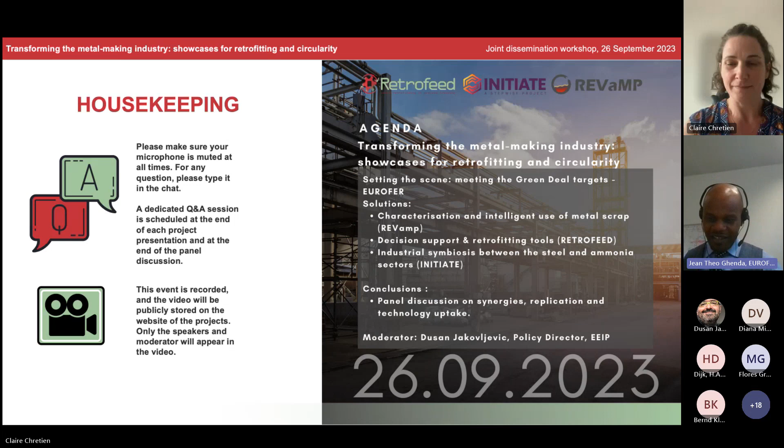Thank you very much, and thank you for inviting me, and good morning, everyone. So transforming the metal making industry, that is the introduction to today's discussion and exchanges we will be having. So would you help with showing the slides? Of course.

Just one second. Next slide. So a short introduction on the European Green Deal.

The European Green Deal has been presented in December 2019. It's the European growth strategy to make the EU economy more sustainable. The overarching objective is for the EU to become climate neutral by 2050. And the core of the implementation activities in the frame of the European Green Deal is the European Climate Law, which turns the 2050 climate neutrality objective of the EU Green Deal into legislation.

They have also defined a milestone toward these targets: a target for greenhouse gas emission reduction in 2030, that should be at least a reduction of 55% compared to 1990.

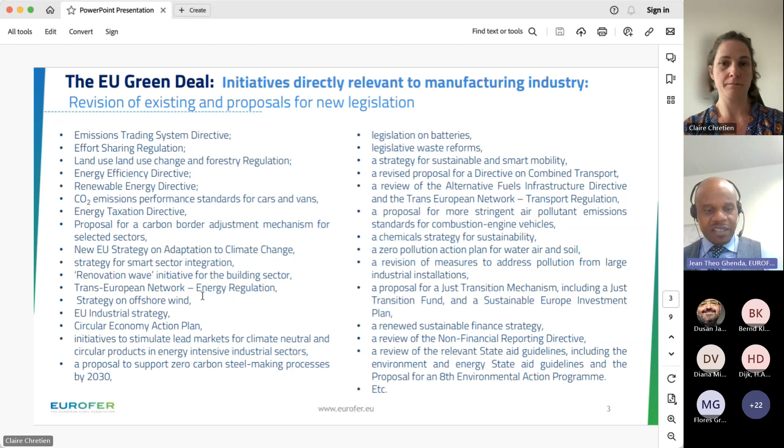Next slide, please. Now, when we talk about decarbonization of the European metal sectors, we know that those sectors have already been decarbonizing. But if we look at the objective of the EU Green Deal becoming climate neutral by 2050, this will require deep carbon emissions cuts, and this deep carbon emissions cut can only be possible through new technological pathways.

If we analyze the different pathways being considered in energy intensive industries, including metal making sectors, we can group those pathways into three blocks. The first one is continuing with fossil carbon, but using less and less - what we call smart carbon usage, which we can achieve through process integration, making the process shorter and using internally the process gases, or through carbon capture and usage. Both process integration and carbon capture usage can also be combined with carbon capture and storage.

The second pathway is to avoid using fossil carbon altogether. How do we do that? This is via using directly electricity or using hydrogen to replace carbon. The third pathway is circular economy approaches. Here, the idea is to enhance the recycling or reuse of residual materials, for example scrap, slag or dust, and also increase the use of residual energy. That will help us increase resource efficiency.

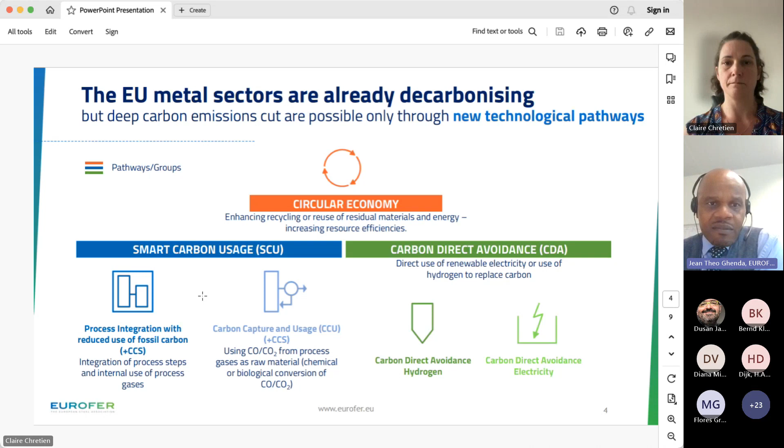Next slide, please. Here I give an example of how we apply it, for the steel industry. We show here that we have key projects for low CO2 steel making. We see that we have different projects across Europe, touching on the different pathways we have just shown. In the steel industry, we have summarized 60 projects.

Those are only the projects that have a TRL of at least 7, and that will start before 2030. Some will already start in 2025 to 2026, and they have the potential of reducing CO2 emissions yearly by around 81 million tons. That is over one third of the current direct and indirect CO2 emissions of the steel industry.

So the transformation will cost a lot of money. We are talking here about capex needs of about 31 billion, and opex needs for the next 10 years will be about 54 billion euros.

Then we will need a lot of energy. For example, for the steel industry alone, we need about 165 terawatt-hours of electricity in 2030. If hydrogen will be produced via electrolysis, for this hydrogen we will need 90 terawatt-hours to produce 2.12 million tons, and then the rest will be 75 terawatt-hours for driving the processes.

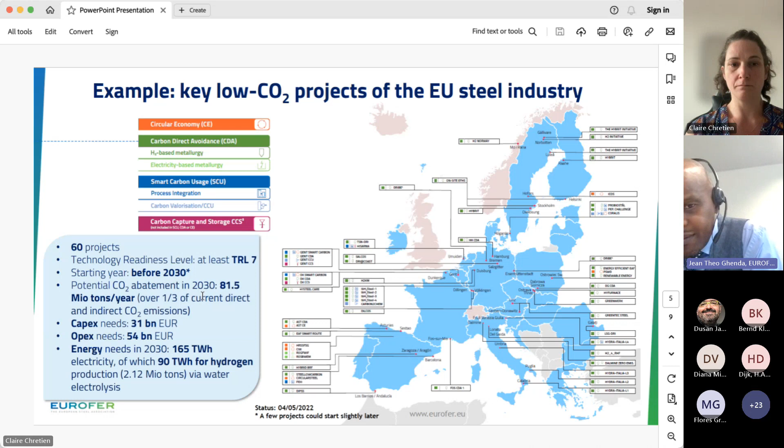Now, if we look at the metal industry in general, we can say that the transition to a net zero economy will be really metal intensive, and metal sectors will be key enablers for this transition to a circular and climate neutral economy in Europe. It will be essential for European strategic autonomy and resilience. We will need big quantities of metal for the necessary transition of our energy system, in order to achieve the EU Green Deal objective.

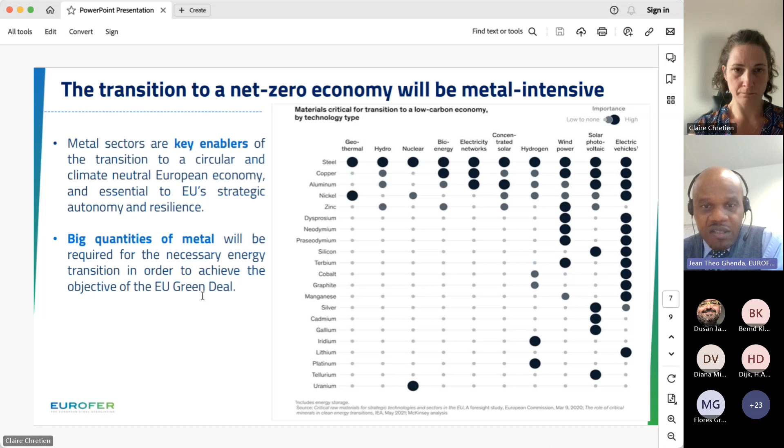Here you can see the result of an analysis made by McKinsey, based also on a study made by the European Commission, and then also based on a study made by the IEA. What we can see here is that, for example, steel, copper, and aluminum will be really needed for this transition.

Now, what are the key drivers? We need some key drivers to ensure real competitiveness, and then to spur the transition of metal sectors. One very important thing we need is to have access to sufficient and affordable CO2-free energy, and then also access to affordable primary and secondary raw material, for example scrap. Metal scrap will be very important.

And then second, what we will need is really better tailored funding and financial incentives across Europe, including the establishment of lead markets for green products, or in general for CO2 low products.

The third thing we will need is a level playing field with global competitors, and this can be achieved through effective EU trade policy, in order to ensure open and fair trade. That includes, for example, the continuation of the EU steel safeguard - that is a very important safety net. It also includes solutions that secure exports under the carbon border adjustment mechanism, which is meant to progressively replace free allocation in the framework of the European emission trading scheme.

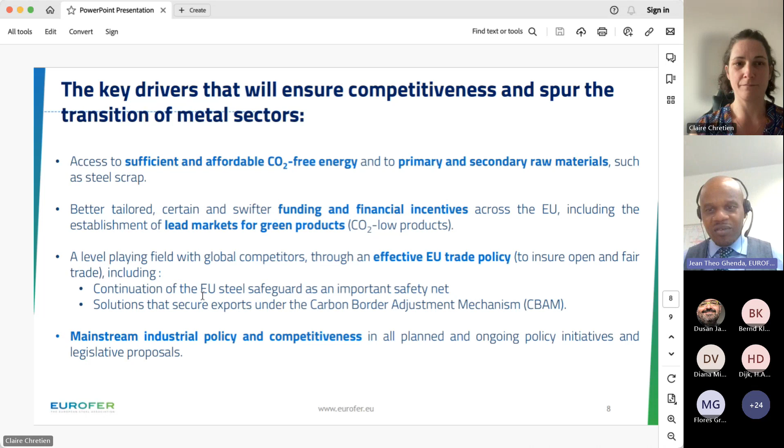So we need not only to look at the objective of protecting the environment, we need to look also at the aspect of economy, competitiveness, and the third aspect will be the social aspect, securing jobs in Europe. So those are the words I've tried to summarize in order to introduce the discussion we'll be having today. If you have further questions, please ask, or we can discuss later on. Thank you very much.

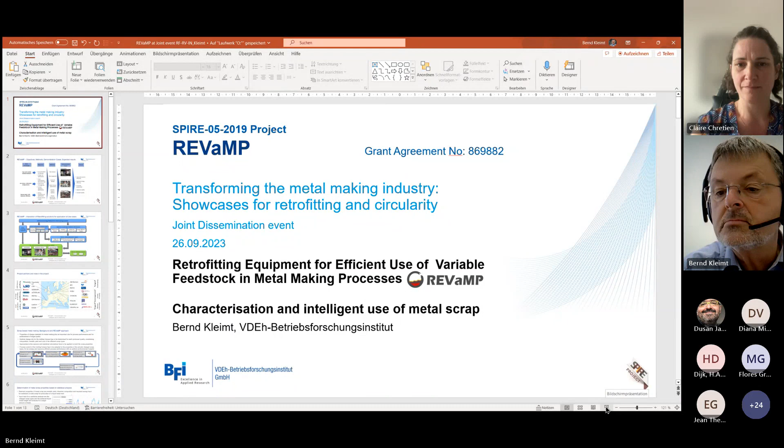So I will present the project REVamp, retrofitting equipment for efficient use of variable feedstock in metal making processes. Today I will focus on a very important part of this project, which is the characterization and intelligent use of metal scrap.

I myself am department manager at VDEh-Betriebsforschungsinstitut in Düsseldorf, Germany, leading the department measurement and automation of steelmaking processes. I'm also the coordinator of this REVamp project.

So what are the objectives of our project? The main challenge we are facing in metal making is that we have to cope with variable material feedstock. Metal scrap is changing a lot in its properties, and these properties are becoming worse over time, as the quality of steels in the metal scrap is becoming worse, including more tramp elements.

We also have to use alternative energy sources for running the processes, for melting the scrap, and we have to operate these melting plants with maximum efficiency.

So the objectives were then to develop tools to characterize the different metal scrap materials and to set up a charge mix optimization for these scrap materials, to preheat scrap also with alternative fuels, then optimize the energy mix and the furnace operation.

This is done also by process models being used for offline simulations, but also for online process control. So methods being used are new sensors, new equipment, especially for scrap preheating, enhanced process models, optimization tools, decision support systems, leading all to better process monitoring and control.

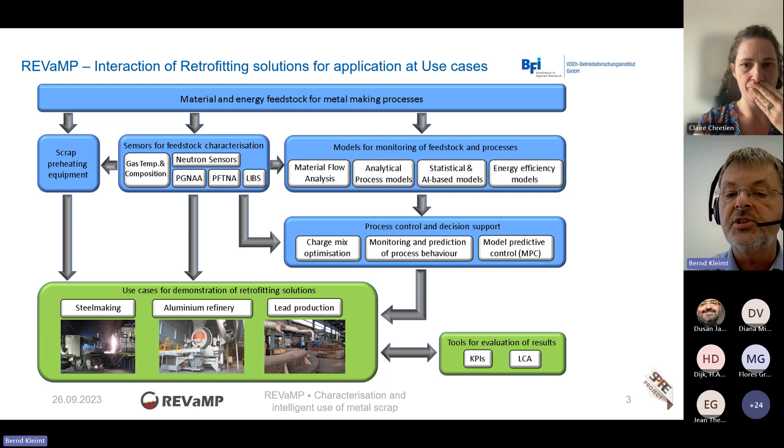These models are material flow analysis, analytical and statistical process models, and energy efficiency models. These models, in combination with the sensors, are used for charge mix optimization, monitoring and prediction of process behavior, and also model predictive control. All the tools are then accompanied by evaluation of KPIs and life cycle analysis.

The partners in the project, we are 16 partners, each focusing on different parts of the metal making industry. As I said, we have three use cases, and also some partners providing sensor technologies, which I will explain in more detail in my presentation, and also partners developing the process models and the scrap mix optimization tools.

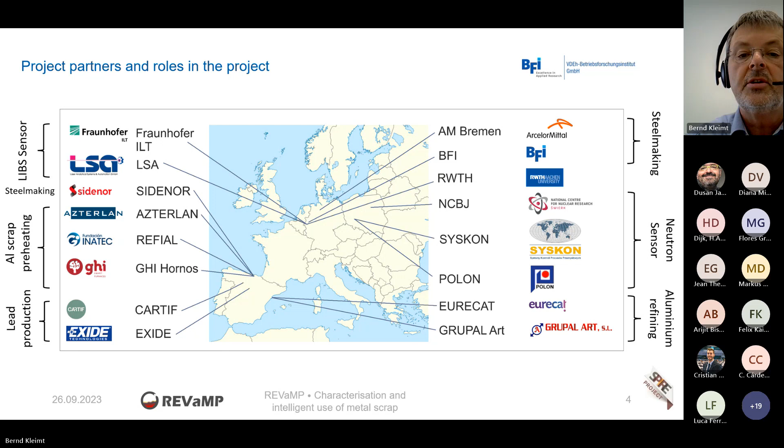So what is scrap-based metal making? What is the background and the approach followed in the REVamp project? As I said earlier, the properties of the charge materials for metal making play a very important role for process performance and also for achievement of the target qualities.

But these properties are changing a lot. They are varying over time, and sometimes varying from batch to batch. So it is important that we have an optimal charge mix for the melting furnace, which has to be determined for each produced quality, considering especially the composition, the metallic yield, and also the costs of the different scrap types.

To assess the properties of the different metal scraps, we have to apply appropriate inline sensors and also statistical calculations so that we can track the scrap properties over time. We also have to control the melting processes and adapt this control to the properties of the actually charged scrap types, so that we can produce the metals in an energy and resource efficient way.

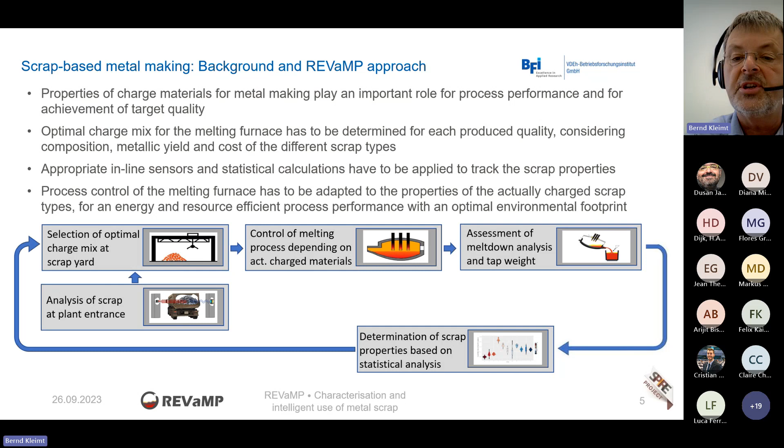I will start with the determination of scrap properties based on statistical analysis. As I said earlier, the relevant properties of metal scrap are the metallic yield, the chemical composition, and the required energy input for meltdown of the solid scrap to produce a liquid metal melt.

So input data for statistical analysis are, on the one hand side, the charge scrap types for each melt, and then the achieved liquid metal weight and analysis for a larger amount of heats. From this database, you can determine the chemical composition and also the metallic yield of each scrap type in use, of course with a certain uncertainty.

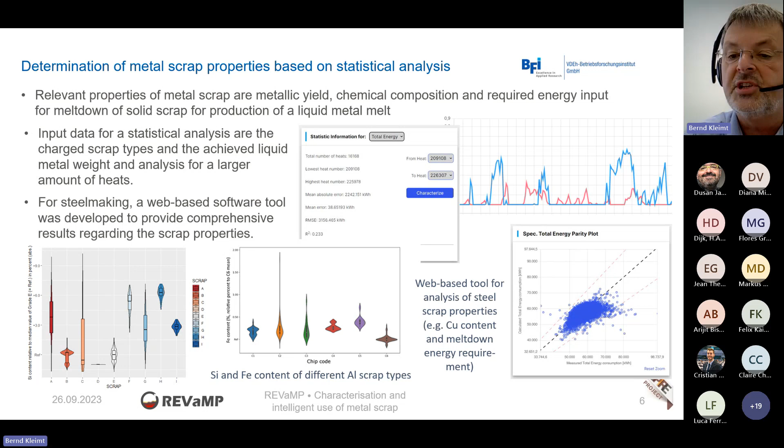So what we did, especially for steel making but also for the other metal making processes, we developed software tools to provide a comprehensive overview on the analysis results regarding the different scrap properties. You can see here, for example, the tracking of the copper content of certain scrap types over time, or you can see evaluation of the required meltdown energy for the different scrap types.

So next is the analysis of the scraps by means of inline measurement technologies. We applied two different technologies.

First of all, for surface analysis, we applied the so-called LIBS technology. LIBS means laser-induced breakdown spectroscopy. Here the principle is that a short laser beam pulse evaporates and excites a small amount of material at the surface of the scrap, and the spectral lines in the optical emissions are collected and analyzed to determine the elemental composition of the metal scrap.

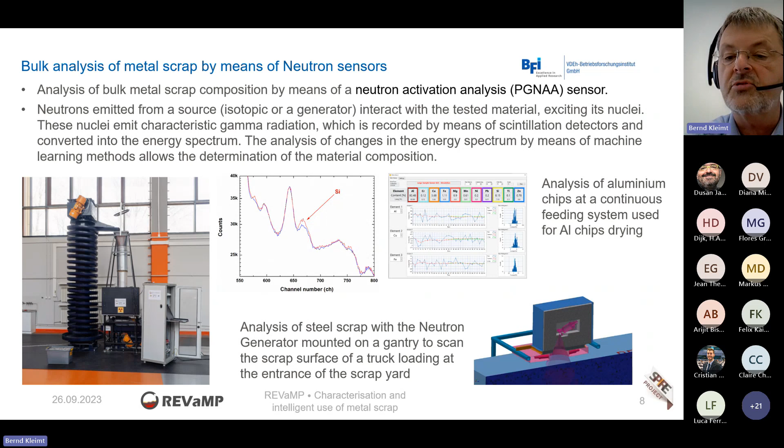So now we have analyzed the metal scrap by means of statistical methods and by means of sensors. Now we have characterized the properties of the steel scrap, and now we have to optimize the charge mix for a certain metal melt to be produced.

Based on this information on chemical composition and metallic yield, a scrap mix optimization software was developed to determine the cost and quality optimal scrap mix for production of a certain metal alloy quality. So you can enter the quality characteristics of the metal melt which shall be produced, and this scrap mix optimizer will then calculate the optimal scrap mix which has to be charged to the furnace to achieve the quality of the metal melt.

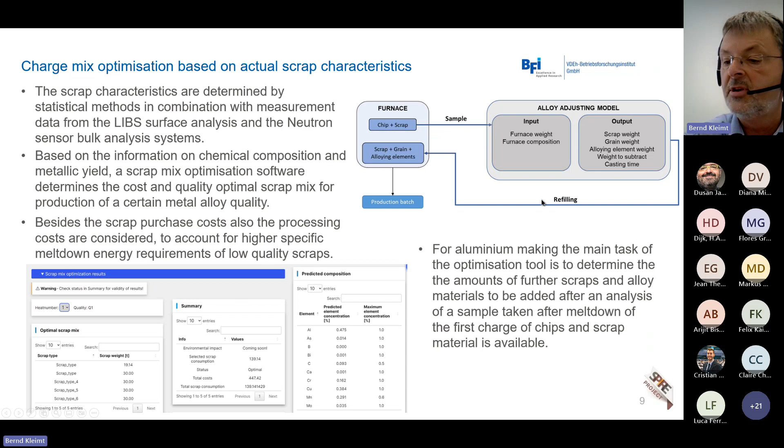So coming to the lead production, these two components, the characterization of the scrap material and the optimization of the charge mix, have been combined in a smart visualization tool where you can characterize the scrap materials. Then in the furnace charging module, the optimal selection of the raw materials and also the fluxes to be charged to the furnace for lead production are calculated, and also the costs of the raw materials per each cast are determined.

And in this application, also a temperature control module monitors the melting process to detect failures occurring in the different stages of the melting process. And this tool is also serving as a decision support tool to establish set points for oxygen and gas injection.

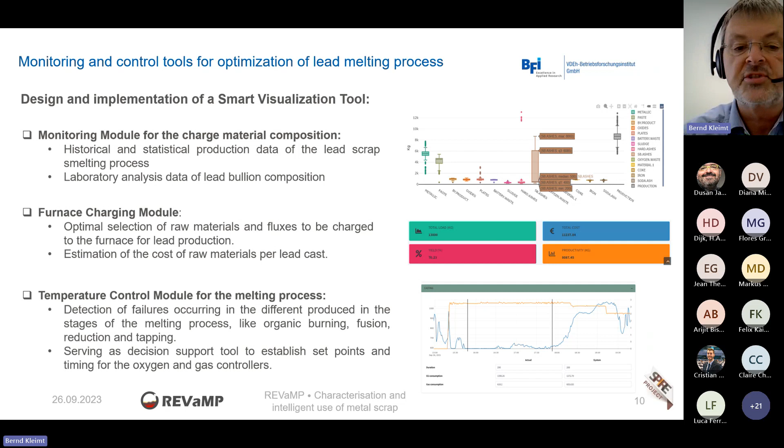So regarding the liquid steel production, we have developed a complete dynamic process model for the electric arc furnace, which is used to melt down the steel scrap. So in this sense, the profiles for the energy input have to be adapted to the actually charged scrap mix, and then a dynamic process model allows for online monitoring and prediction of the actual process behavior.

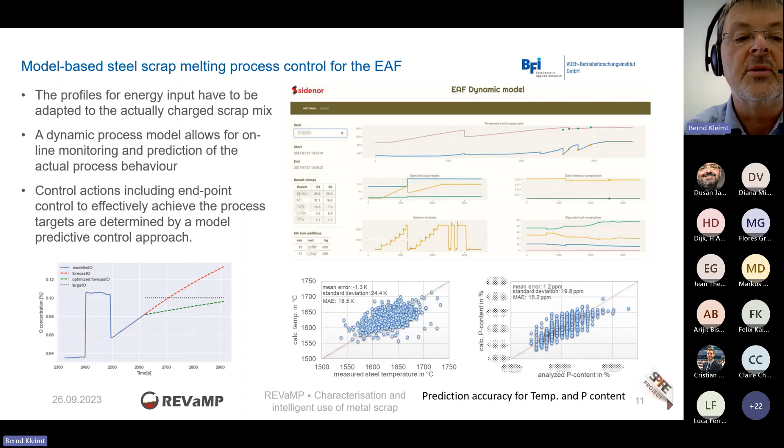This is displayed to the operator, as you can see here in the upper right part, and the accuracy of such a model is quite good. So we can predict the achieved melt temperature and also the achieved phosphorus content, for example, of the steel melt. And then control actions, including endpoint control, are applied to effectively achieve the process targets. And this is determined by a model predictive control approach.

Yes, this brings me to the last slide of my presentation. I would conclude with the expected benefits for the process industry and the transferability of the results. So first of all, benefits: the statistical models and the inline measurement techniques for scrap characterization in combination with a charge mix optimization tool allow to enhance the utilization of metal scrap as secondary raw material.

So this means that also low quality scrap types can be used if the application of these scrap types is performed under a very tight control, so that you know exactly what comes into the steel melt, into the metal melt, when charging these low quality scrap types. And this in turn drastically reduces the CO2 emissions, which are normally connected with the reduction of primary raw materials like iron ore or aluminum oxide. So when using secondary raw materials, you do not need so much of the primary raw materials, and this will reduce CO2 emissions drastically.

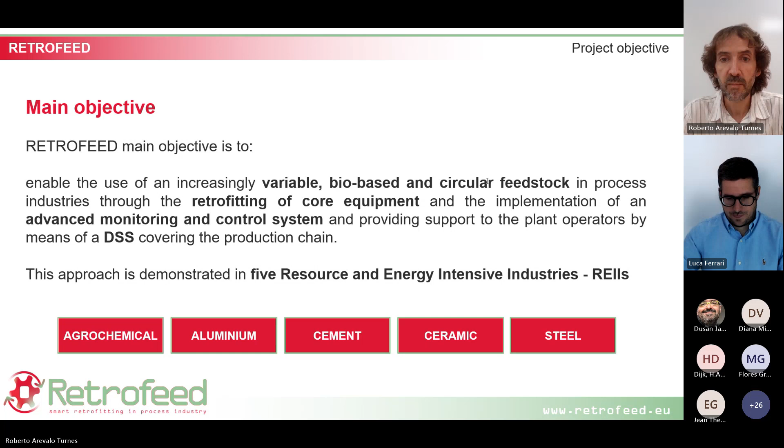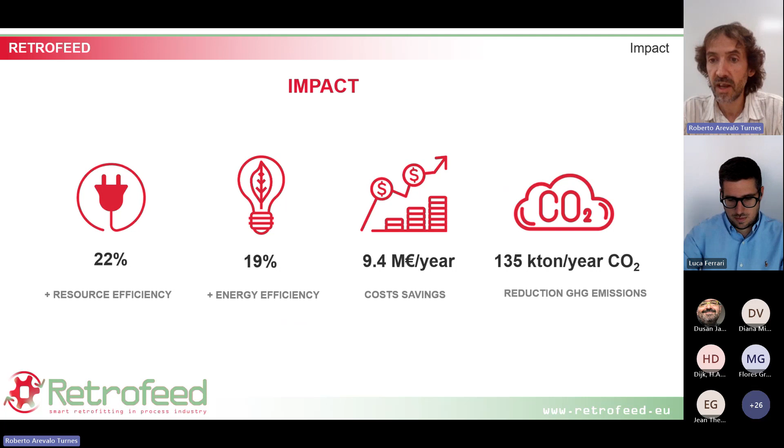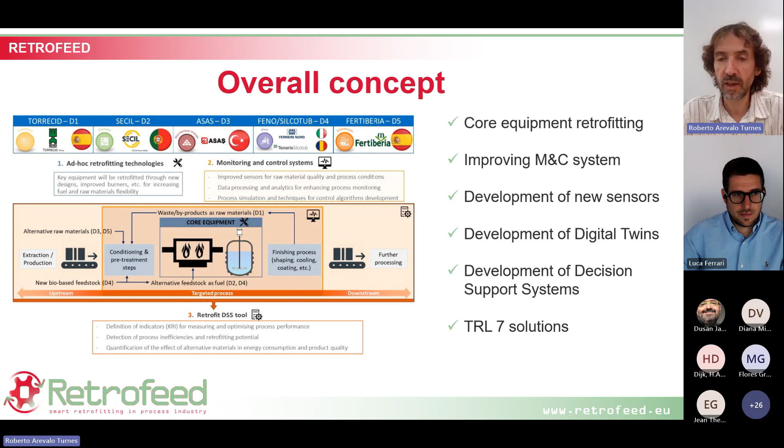All these modeling tools, the digital twins, machine learning, etc., are going to be included in the DSS tool, which is composed also by many other tools. For example, tools to calculate KRI, CAPEX, scheduling production, forecasting prices, etc. Our solutions aim at a TRL of 7, so it's quite high. And in some cases, they are already in place and giving good results.

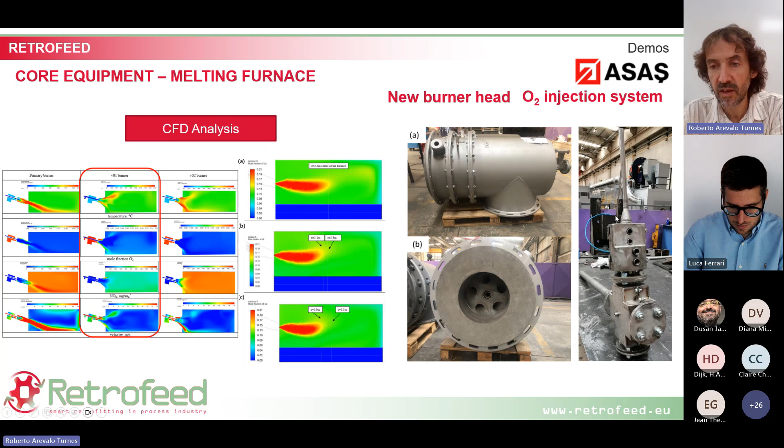So in the aluminum sector, we are working with ASAS. The goal of ASAS is to increase 50% the amount of scrap, to reduce energy consumption, implement a more efficient combustion, and reduce GHG emissions. So to this end, we have developed within the project a new burner, which was first tested in CFD simulations, and there is also a new oxygen injector, also simulated previously in CFD to choose the best design. And here are the final burner and the final oxygen injection system developed.

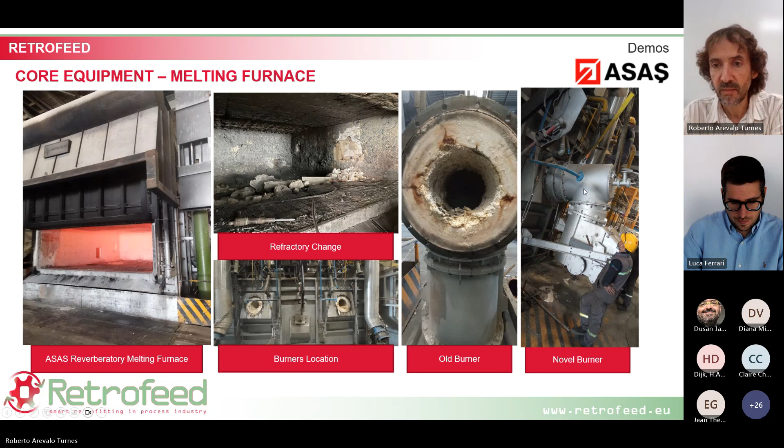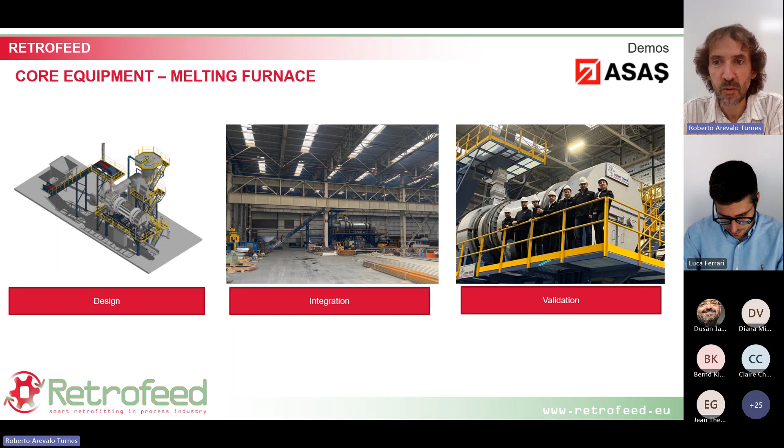This is the retrofitting process. This is the aluminum furnace. Here are the old burners, and here is one of the new burners in place. And here, this is a completely new equipment, the delacquering system, which is used to remove lacquers and paintings and so on from aluminum, for example, from Coke cans and so on. That allows all this new scrap to be included in the project.

And this is the result of all this work. Here we have the scrap that is being loaded into the delacquering system and then to the furnace. And here you can see the final result, which is our very own aluminum billet produced more efficiently.

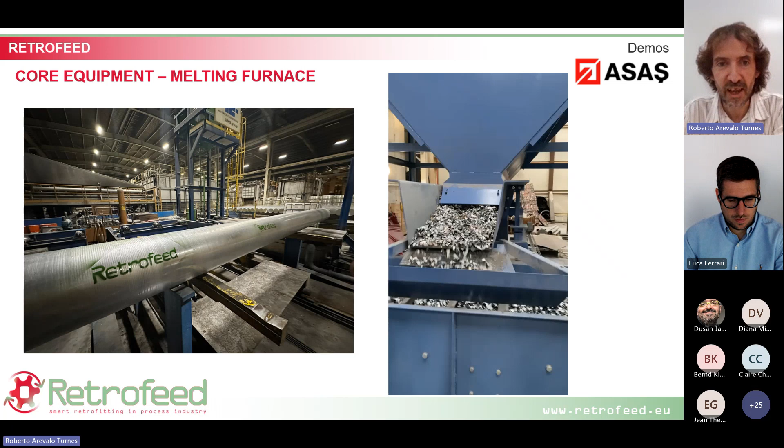In the steel sector, we have two companies, the Pittini Group and Tenaris Silcotub. They both aim at the same goals, which is the reduction of GHG emissions, use of alternative feedstock, and to improve the monitoring and control. Here also we have run CFD simulations to retrofit the burners that are used in the electric arc furnace. This one. Here is the final design in concept.

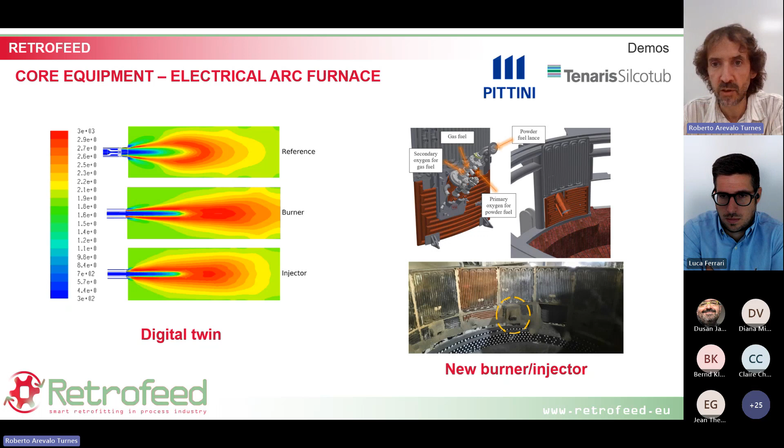This also implements an oxygen lance to increase the temperature of the combustion, and in this way to reduce the amount of natural gas that you need to use. And here is the electric arc furnace. And we have 3 images showing the flame using only the alternative material. This is the flame using natural gas and oxygen, and this is the flame using alternative material and natural gas, but with a reduced amount of natural gas, so you can see that the flame is quite powerful.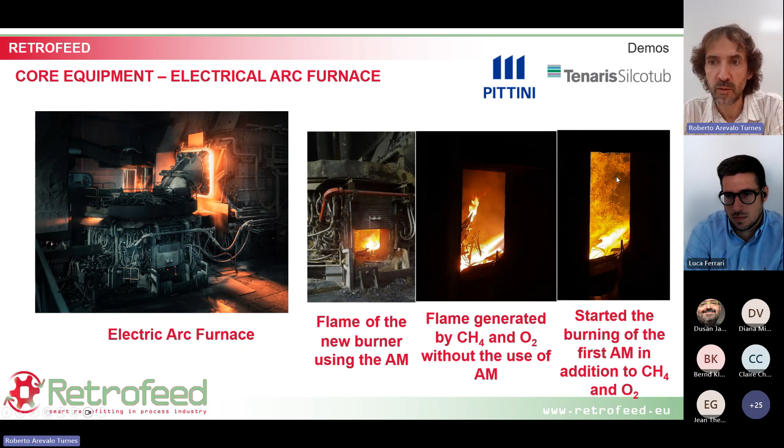In the steel sector, we are doing tests with several materials to be the providers of carbon. We are testing polymers, tire grains, limestone enriched polymers, and also biochar. As you can see here, we are doing extensive tests with a lot of material and trying them in a lot of heats of the furnace.

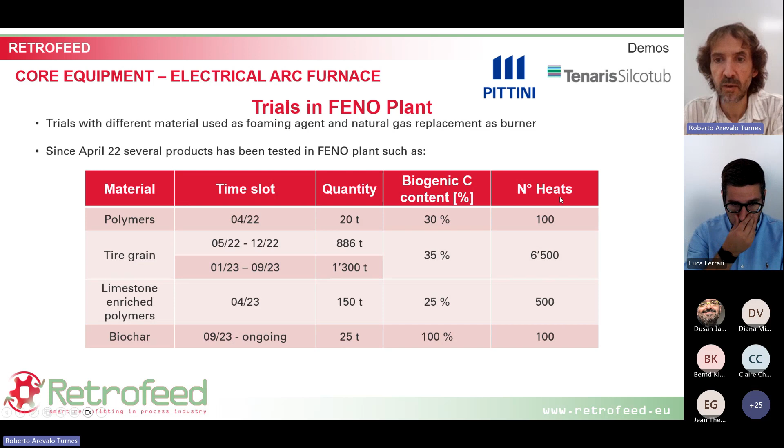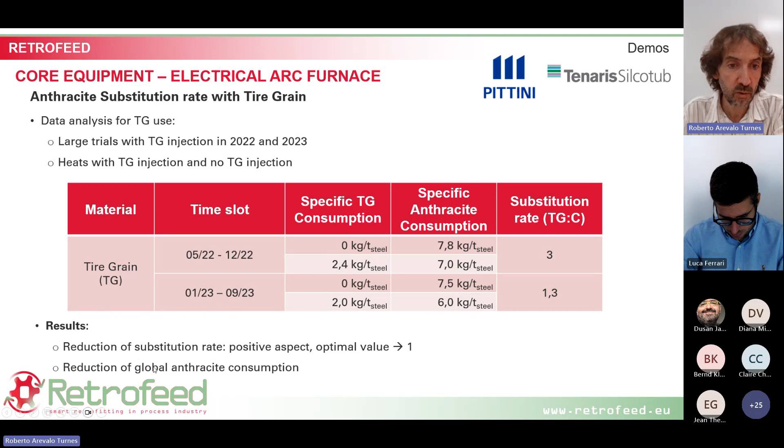And these are the trials with tire grains. Here, what we are achieving is a high substitution rate with tire grains, so a new alternative material. And the goal of this test is to reduce the global anthracite consumption. This is for the 2 demos in the metal sector, and I'm going to give a brief overview of the other demos just to complete the overview of the project.

Fertiberia is in the agrochemical sector, and they are aiming to replace 10% of the currently used phosphorus sources. This is going to be done with a new reactor that was first tested in CFD simulations and then was commissioned to an engineering company. And this is the result, the new reactor that will be placed in the next few weeks.

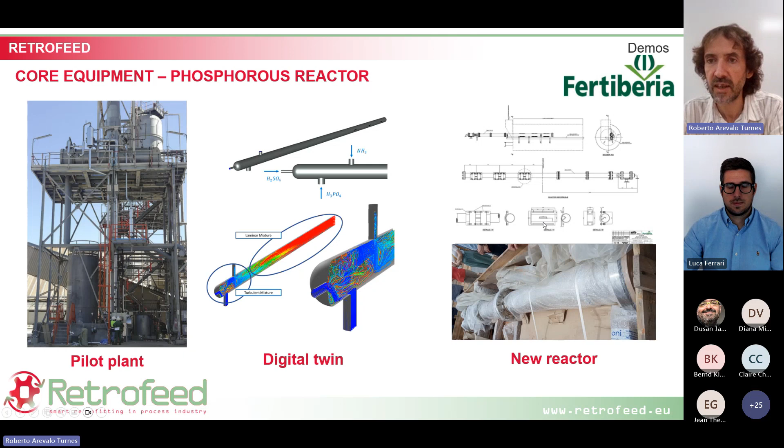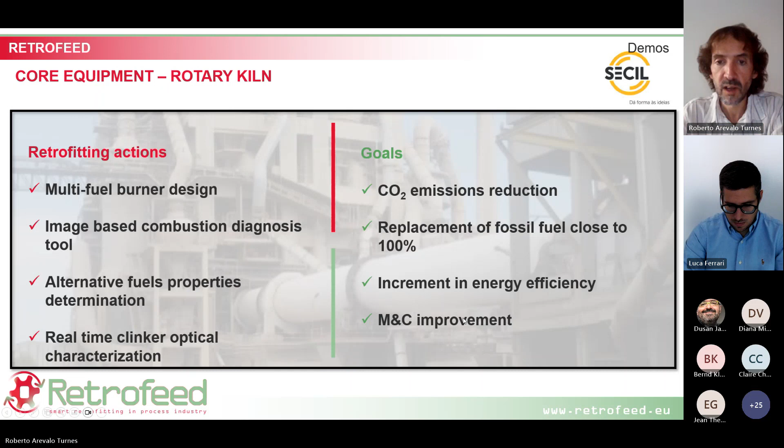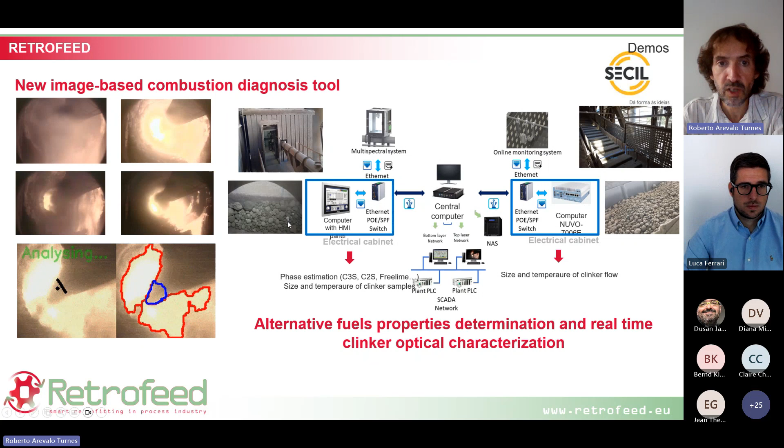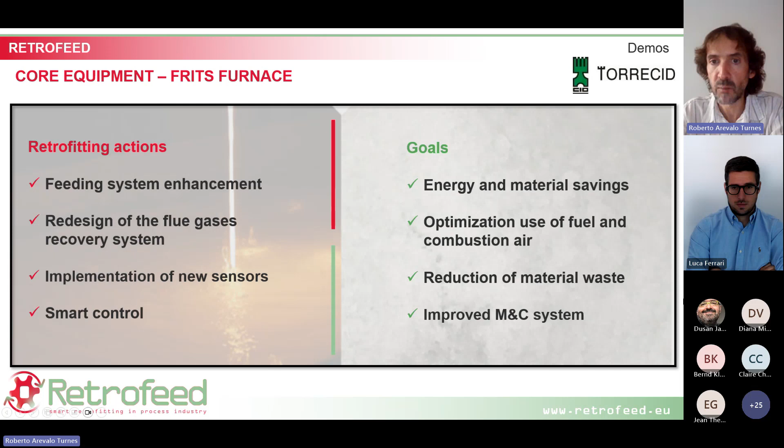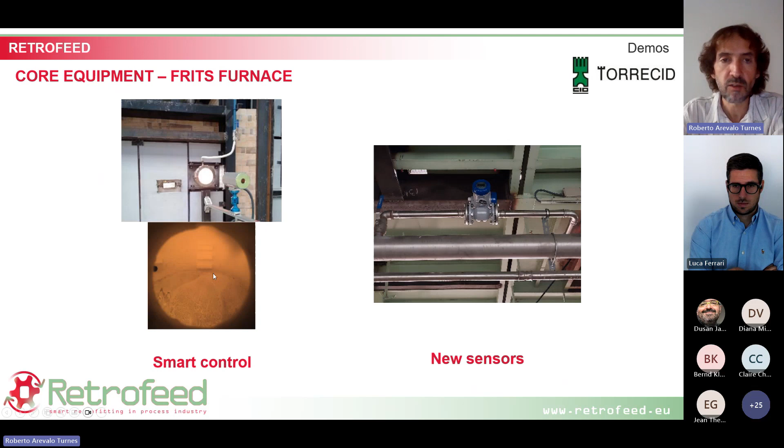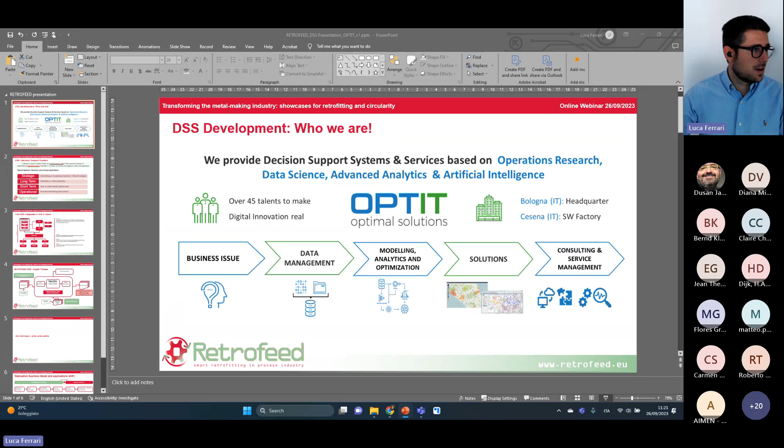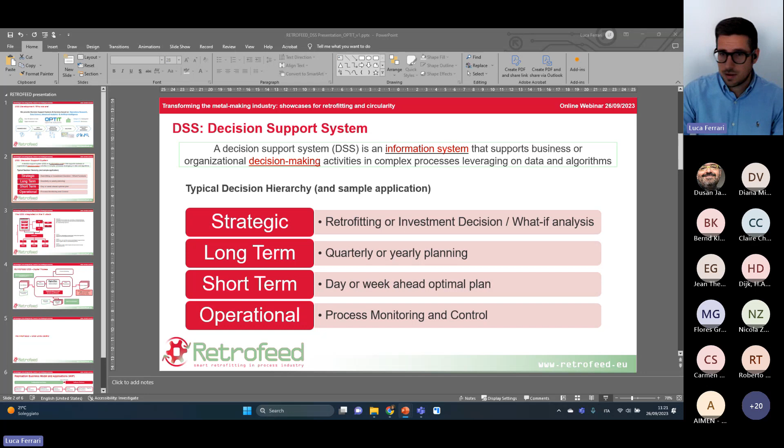Okay, thank you, Roberto. I hope you can hear me. So let me share my screen. So here, you should see my screen now. I'm Luca Ferrari. So as Roberto said, I'm a senior consultant in Optit. So let me swap, I think I have the wrong screen. No, it's okay. We can see your presentation. Okay, in the presentation mode or the? No, it's not presentation mode, but it's okay again. Okay, but I can change it. You should have too many screens. Picked the wrong one. Sorry about that. Just give me 1 second. And okay, now you should see the presentation, right?

Yes, perfect. So basically, as Optit, we are a company specialized in the development of digital tools that leverage artificial intelligence and operation research algorithms. So within RETROFEED, what we built was a decision support system that could orchestrate a series of models, as Roberto explained before, to optimize and simulate the various industrial processes.

So what is a decision support system? Just briefly explaining to you. It's a tool that could support operators and decision makers within any industry in taking more informed decisions based on the data that you have available.

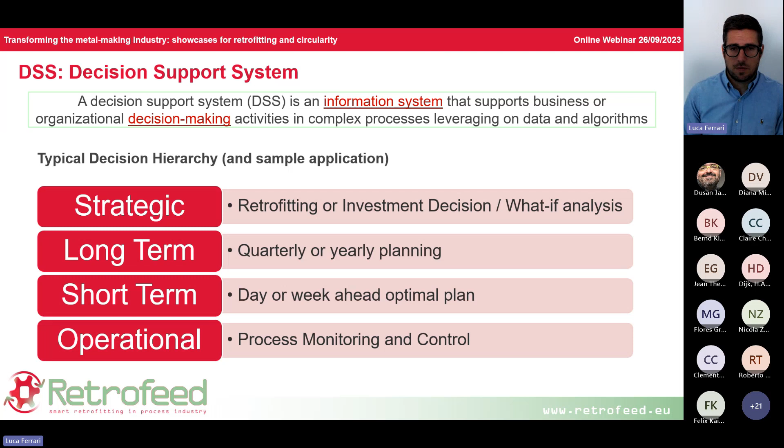So it could be a strategic decision regarding retrofitting or investment, could be a long-term type of decision, for instance budgeting or planning yearly production, or short-term, daily or weekly production plan, which is one of the most commonly used cases for supporting decisions, or operational decisions. So daily operation could be helped by having a tool that could be used to take informed decisions, and I will show you later an example.

So how is the DSS integrated within an IT stack? We know that most of the data will come from sensors and actuators, the PLCs and the SCADA, which are the backbone of the current industrial IT information stack.

A lot of companies are now investing in MES systems and other tools to start using the data that are collected in a more appropriate way. So what we try to build here with the DSS is something that could get along with the MES or other type of tool, replacing in some instances Excel or other business intelligence applications, to run what we call descriptive and prescriptive types of analytics.

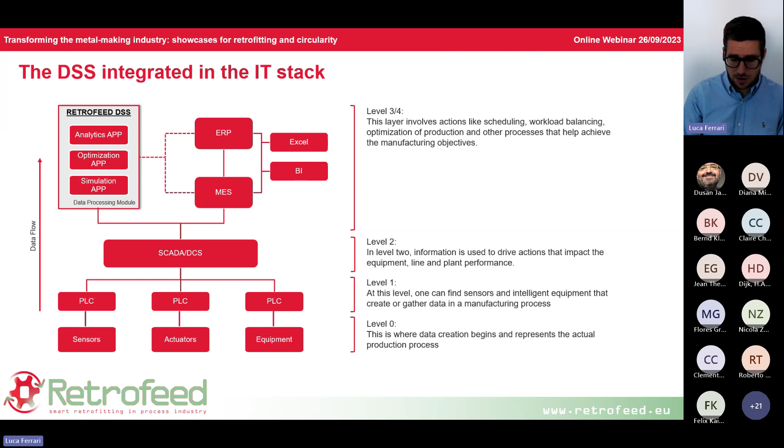So we have analytics apps that could be used to analyze and monitor the data, optimization apps that could help in taking decisions, and simulation apps that could be used to evaluate beforehand how the process would behave, considering different parameters. As Roberto explained before, what we did in all demo cases is build a digital twin, which is the core of the application.

It could be built with different types of languages. Around the digital twin, we build what we call value chain models, models that could optimize the selection of raw materials or the use of energy for that specific process, and at the same time monitor the emissions and the process output, considering very importantly the cost of that type of production, not only the energy involved.

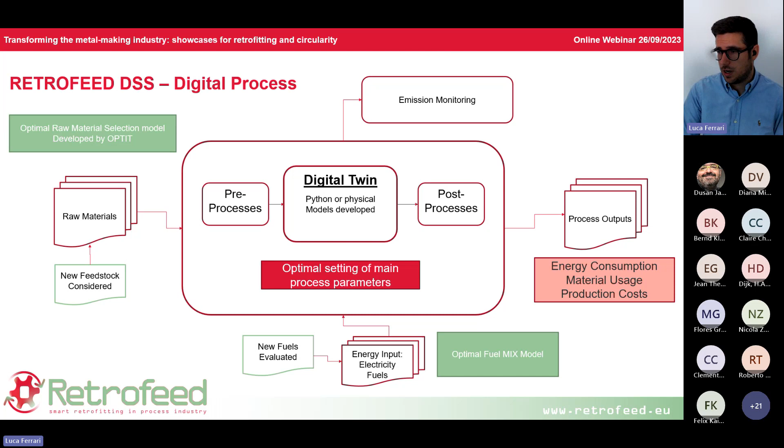But let me show you quickly, I will change my screen and show you the application. So here we have... maybe I have the wrong screen again. Sorry, Teams is behaving a little bit weird. I need a bigger screen. So let me show the application quickly.

So here we have the main dashboard where you can see a simulation of a production batch. On the top left, you see a list of tests that we've done on a specific process. In this case it's the steel process, where we try to simulate one single batch of production. And here you can see a different test where the digital twin simulated the process. On the bottom, you have a table with a series of KPIs which summarize the batch production, and you can change the view to evaluate different types of KPIs.

So for instance, it's very important to see the cost of that type of production. And on the right you see the same KPI, but on a timely basis. So here you can see, for instance, these are just examples of KPIs, but you have electricity consumption on a minute basis for gas and electricity. You can change the view as well here.

So you can have an understanding of what the future batch could look like based on the input that you give to the model. And you can change the inputs, put different types of information. You give a name, provide the quantity that you want to try, and put a name.

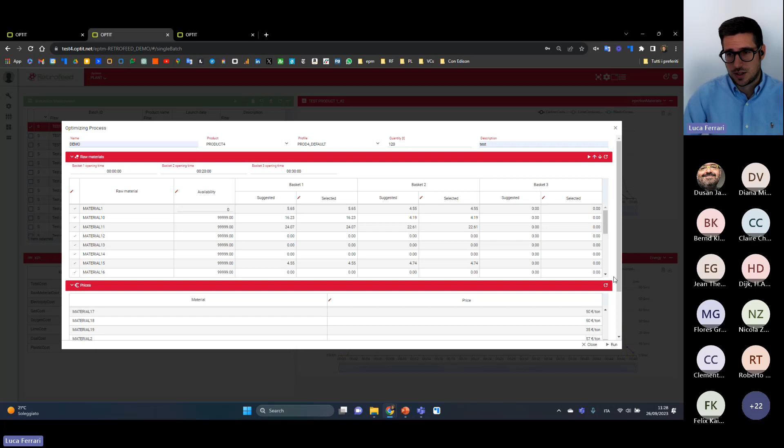You can run an optimization model that could be used to pre-evaluate, based on the input, what's the expected outcome of the system. And then you click run, and the model will simulate and return this type of result.

You can compare different test products, and then see in different charts what are the main differences between the two instances. So you can make different simulations and see how the model behaves.

The last dashboard I want to show you today is the test production, where you can simulate, for instance, the next 24 hours of production. Here I launched 3 different batches, and you can see on the chart, similar to what was done before, different types of parameters for the various parts, shown over 2.5 hours of production in this case, and at the bottom the summary of the 3 batches: product 1, 2, and 3.

Here you have the energy component and the input, so you can evaluate the cost. Everything here can be connected to real data. So in case you want to connect the actual plant, you can even see the measured data, and the framework we built will calculate all the KPIs based on the measured data from the factory. Then you can compare what the simulation would look like versus what the actual production was.

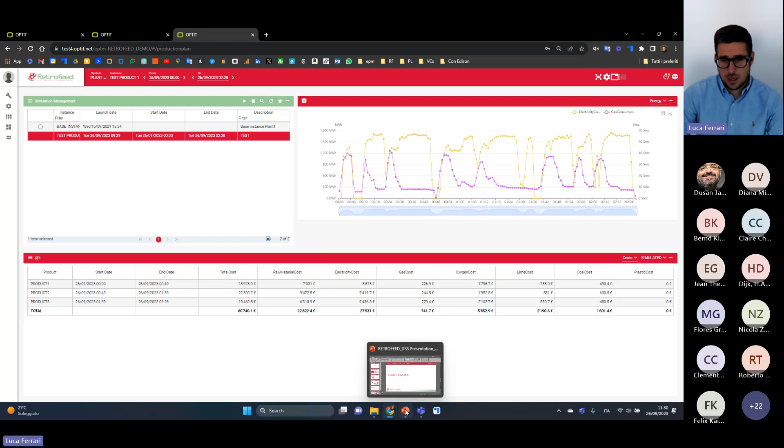So I will go back to the presentation, and here's what stage we are at right now. We are almost at the end of the RETROFEED project, but we built the tool in such a way that it could be leveraged in the market. So different models, if they were available, could be connected to the system and used within the framework. We are currently trying to replicate the study in other types of furnaces within the RETROFEED demo cases, because we saw there are a lot of advantages in using digital tools to understand production. But we are also trying to leverage this experience to build a tool that could be used by the entire industry and definitely improve the current situation, considering the targets the EU will set for the environment and so on. Thank you everyone for listening.

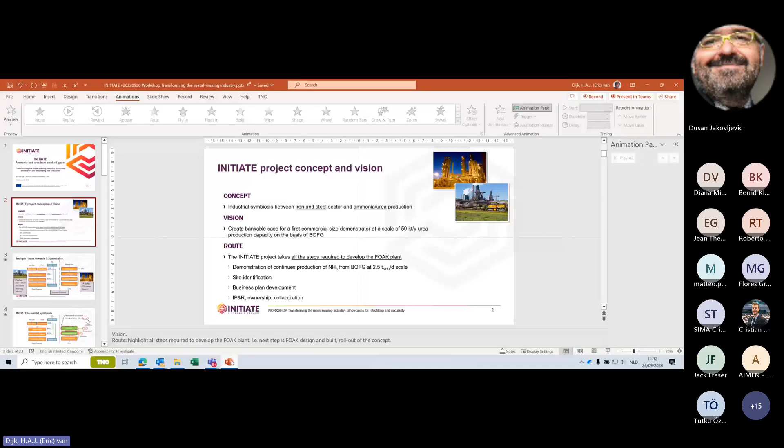So I will be presenting the Initiate project, and in contrast to the previous two projects, REVamp and RETROFEED, which are closing at the end of their projects, plenty of results have been presented. The Initiate project is about halfway through, so I will give you an update on the project and its status. My name is Eric van Dijk, project coordinator, and I work at TNO in the Netherlands, the research institute.

So to start with the concept and vision of the Initiate project: it is about the demonstration of one symbiosis system between the iron and steel sector and ammonia and urea production. So linking two main industrial processes which are very carbon intensive, aiming at using the off-gases from one process as a feedstock for the other. The vision of the project is to create a bankable case for the first commercial-size demonstrator, actually producing 50 kilotons of urea on the basis of BOF gas.

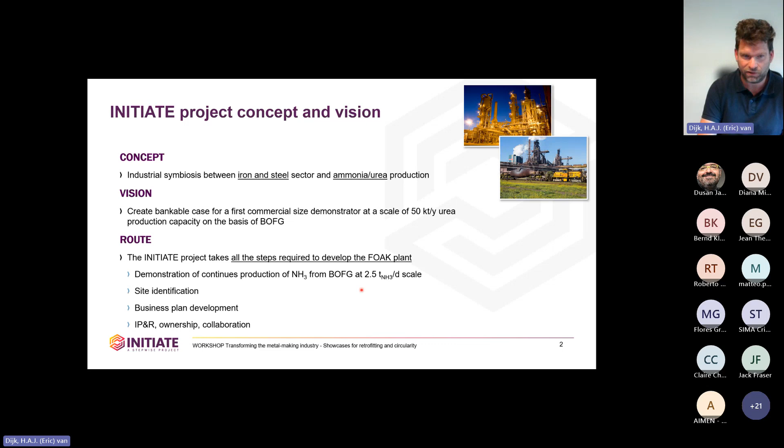But also, of course, for the business case and the rollout, the site identification and the business plan development, and the IP, ownership and collaboration models are going to be developed within this project. So first, some words on the concept itself.

Here we see block diagrams on the left-hand side of a steel plant, really very simplified, but it gives the most important processes, and on the right-hand side, the production of urea. So to start with the steel plant, you have iron ore intake, coal intake for the traditional way of steel making, coke plant producing coke oven gas, blast furnace to make pig iron, and then basic oxygen furnace to make steel, and then you do the casting and rolling.

Well, the coke plant, the blast furnace, and the basic oxygen furnace produce off gases which have caloric value, and they are normally used internally, and the surplus is used in the power plant to make electricity, which also goes back to the steel plant for the most part.

For urea production, it's normally done by reforming of natural gas, cleanup and CO2 removal. Then you produce from the hydrogen-nitrogen mixture ammonia and recombine that with some CO2 to form urea.

Well, as said, both industries have a significant carbon intensity, typically for both close to 2 tons of CO2 per ton of product, so being hot rolled coil for steel or ammonia for the ammonia industry. And both industries are also looking into ways of greening up. So for the steel industry, there's a trend from switching from coal as a reductant to natural gas and hydrogen.

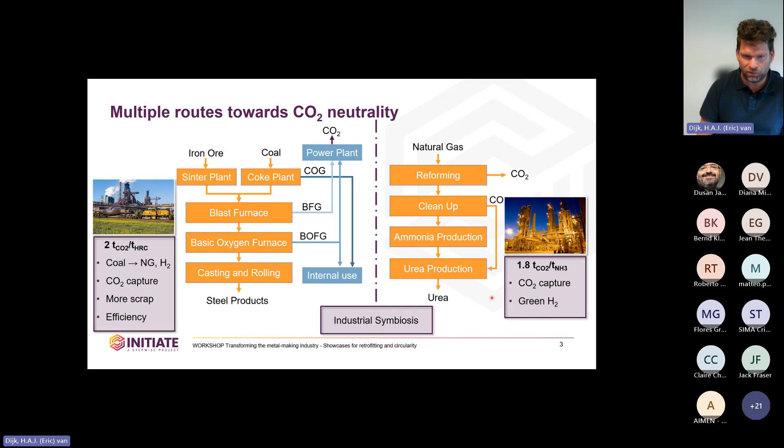For the ammonia sector, they are considering, of course, CO2 capture and also the use of green hydrogen. And what we are developing is actually demonstrating the symbiosis between these industries. So how does that work?

We are going to take the BOF gas, the basic oxygen furnace gas, and use that as a feedstock for the ammonia and urea production. And why the basic oxygen furnace gas? That's because this product has a very favorable nitrogen carbon monoxide content.

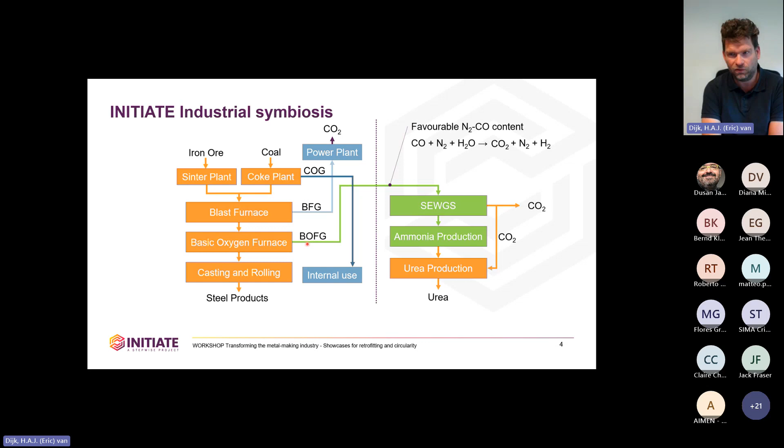So if you would apply water gas shift to that, so convert the CO with steam into CO2 and hydrogen, remove the CO2, then with the resulting product, you have a very nice ratio of these two reactants to produce ammonia. And then with part of the CO2, you can combine it to form urea. So you have CO2 for sequestration, and you have a certain amount of CO2 that you utilize to make urea.

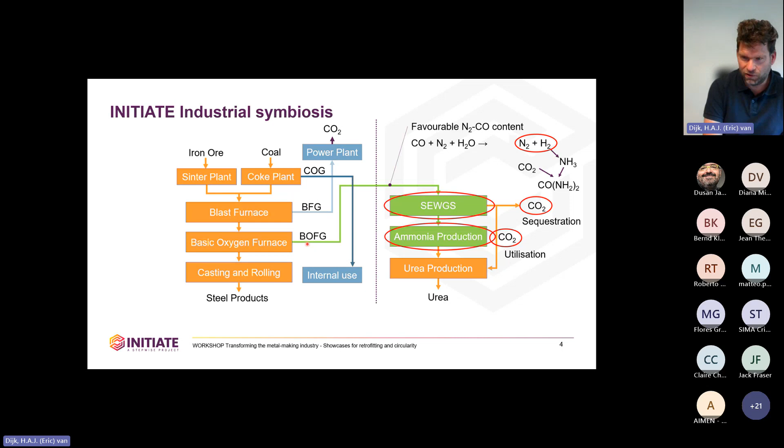So this is the concept that we are going to demonstrate and build a business case for. It has two enabling technologies, which is the sorption water gas shift technology by TNO, and a novel type of ammonia production loop by NextChem and Stamicarbon.

So this is an overview of the partners in the project. We are 11 partners. It's a 5-year project. As said, we are approximately halfway now. It's a 21 million euro subsidy project, and half of that is approximately allocated to the demonstration of the technology, so building a pilot and operating the pilot.

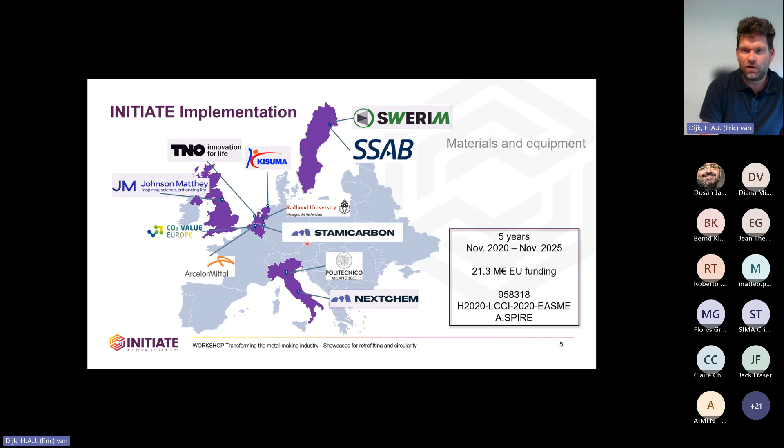We cover the whole value chain from material suppliers and equipment suppliers, Johnson Matthey and Kisuma for the active materials, TNO and NextChem for the technologies, so the equipment, and it's going to be demonstrated in Sweden, in the northern part of Sweden. And we have technology licensors, Stamicarbon and NextChem for the ammonia loop, and TNO for the sorption water gas shift technology.

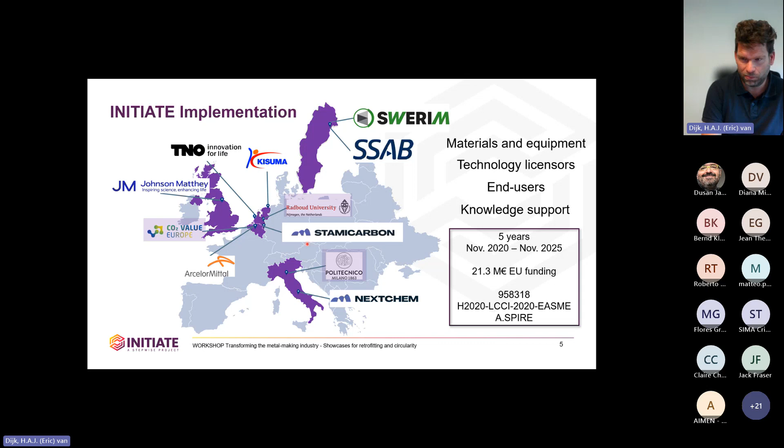And we have end users, the big steel industries in Europe, SSAB and ArcelorMittal. And we have knowledge support from universities and CO2 Value Europe. So that covers the whole value chain.

So some words on the enabling technologies. As mentioned, there's two of them. There's the sorption water gas shift technology, which is developed by TNO and is a solid-based technology for efficiently removing CO2 from a feed gas and simultaneously performing the water gas shift reaction. So with the BOF gas, we aim for a hydrogen-nitrogen rich mixture at the top for ammonia production and CO2 for storage.

And the second one, as mentioned, the ammonia loop developed by NextChem. This particular loop is suitable for variable hydrogen-nitrogen ratios, and why that is, I'll explain in a minute. It has a simplified knockout and recycle loop in the ammonia section, and we think it's very suitable for dealing with dynamics which are inherent to the feed.

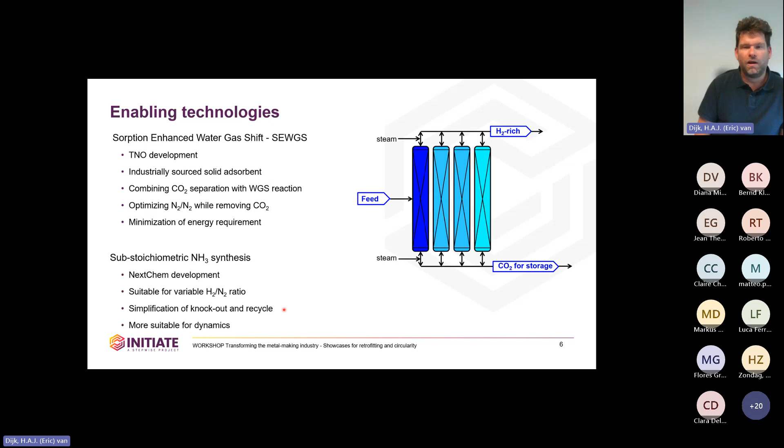This is the PERT diagram of the project. We'll not go into detail, but it's clear from this diagram that the demonstration is an important aspect of the project, and then the modeling for understanding the layout of this concept, but also the commercial implementation plan. So I will give you an update on both the demonstration and where we are with the modeling.

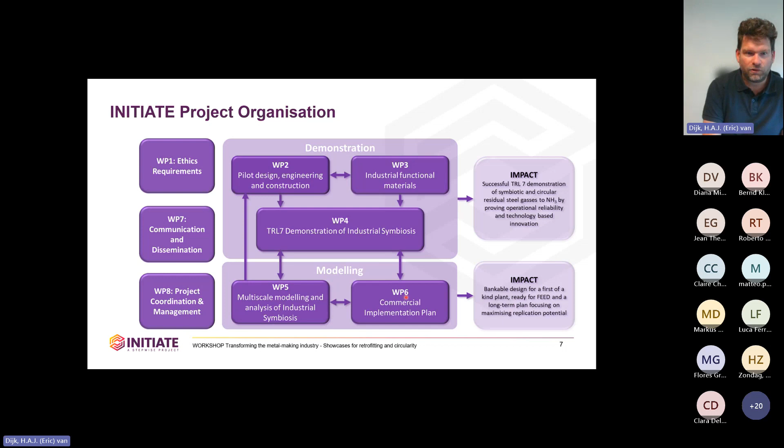Very nice to indicate that in 2017 we installed a single column SEWGS reactor, a sorption enhanced water gas shift reactor, and that has served for 6 years in different projects. We have now removed it, and we will build a 3-column system to demonstrate the whole cycle.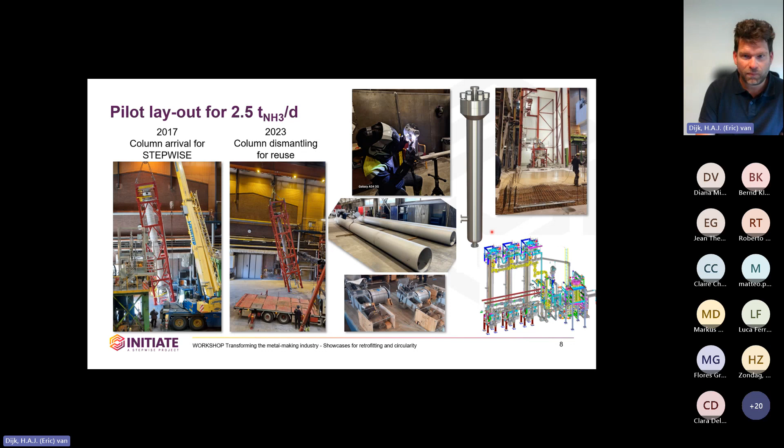So a lot of things are going on for the pilot, and we aim at executing our first campaign at this time next year, approximately. So that's work ongoing. Now some words on the modeling.

It's a significant part of the project. First of all, the dynamic modeling of the process. That's really important because we take the BOF gas, and the BOF process itself is a batch-wise process, so it's inherently dynamic, and we have to deal with these dynamics in converting the feed gas into ammonia.

So typically in a BOF cradle, you have these blows, and only during the blow you collect the gas, so that needs to be stored in a buffer vessel. Most of the time there are multiple BOF cradles working in parallel, so that creates a continuous product flow but with varying composition, as illustrated here. You see that it's quite dynamic in the contents of CO, nitrogen, and CO2, and we have to design a process that can actually handle this.

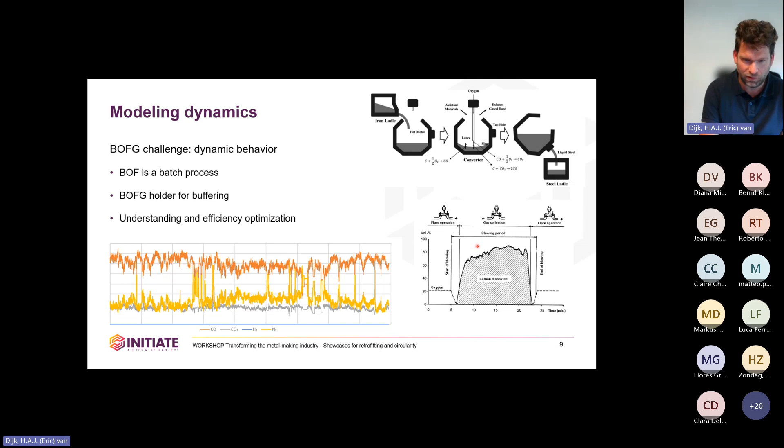So understanding these dynamics, modeling these dynamics, and optimizing the downstream system for this is a really important step in the process. For that, we also create a dynamic twin of the process.

Currently we have dynamic models of the feed section, the sorption-enhanced water gas shift, buffering, and the cleanup of the gas, and we are currently also working on a dynamic model of the ammonia loop. By the end of the year, this whole process will be described by dynamic models, and that's used then for the pilot, but also for predictions on real scale plant behavior.

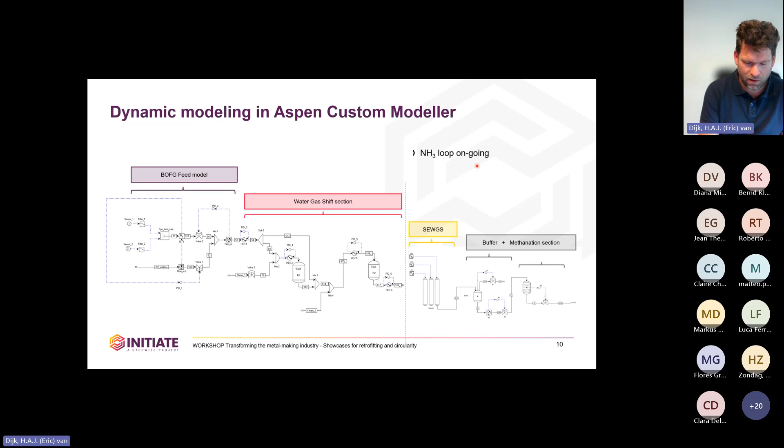The other modeling is, of course, on techno-economics, life cycle analysis, and the business case, aimed at quantitative analysis for direct comparison of different options. So we have defined base cases and reference cases, and those will be compared against the initiate case, and of course we will include scenarios for evaluation.

Scenarios for CO2 intensity of electricity, for example fuel mix as a general characteristic, and also pricing of different feedstocks and products. And of course, for the business case modeling, location-dependent assumptions are really critical.

So this work is really ongoing now, and we are considering the steel plant at a 3 million ton hot rolled coil per year capacity, and we are considering 2 sizes of ammonia and also urea production.

And the sizes we consider are linked to what kind of gas that we want to use. So for the small size, we will only take the BOF gas from the steel plant and use that as input for the ammonia production.

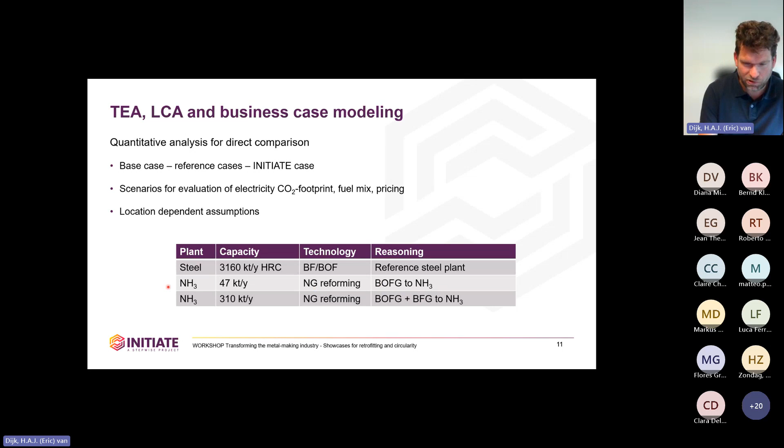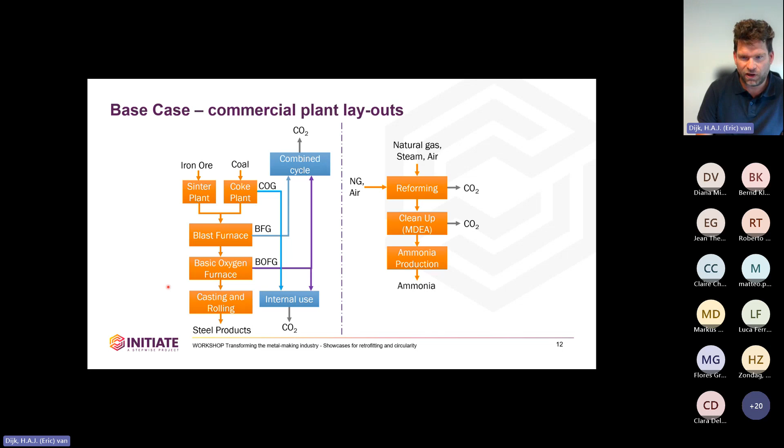So the base cases are the individual processes, steel on the left-hand side and ammonia on the right-hand side. If you then look at the reference cases, that means the individual processes, but decarbonizing with existing, more or less existing, technology.

So for the steel plant, that would be sending all the gases that go to the power plant to a decarbonization unit, with water gas shift and amine scrubbing. That's the reference case for the steel plant, and the reference case for ammonia is to send the flue gases from the reforming section via amine scrubbing to decarbonize the flue gases there. So that's the reference cases.

And then the initiate case, as presented before, uses the BOF gas for small scale at least, using the BOF gas as input for the ammonia production.

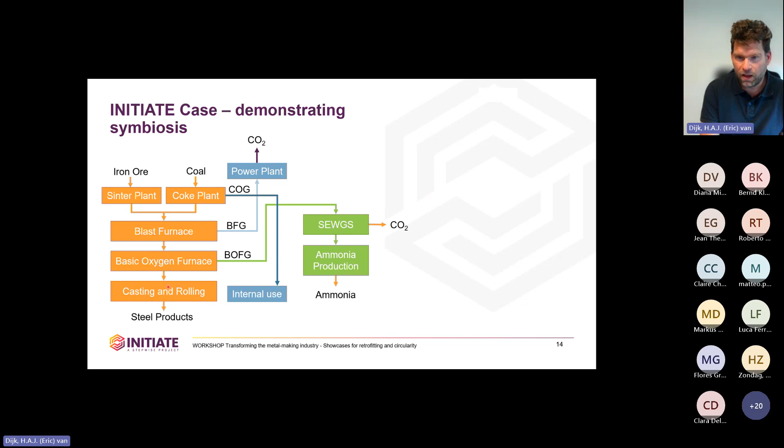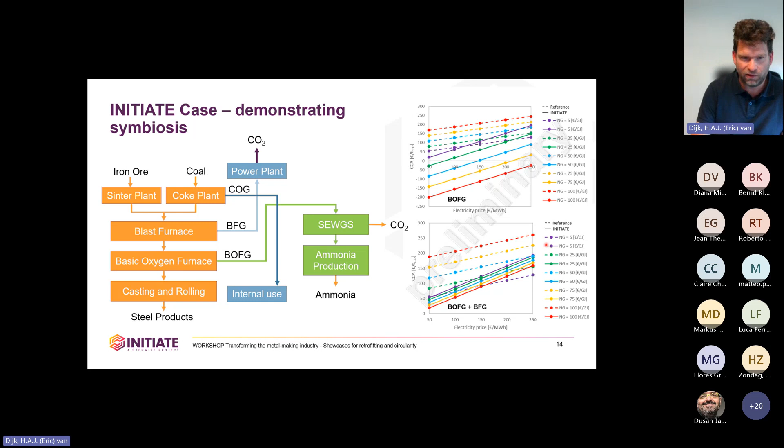This involves taking both the BOF gas and the blast furnace gas to make ammonia and urea. However, the difference is smaller, mainly because you need to compensate the high nitrogen content with, for example, hydrogen from electrolyzers, which is a much more energy intensive system. It also means that if you take out both of these gases from a steel plant, they have to supplement the energy content, requiring additional natural gas or electricity. So this is a much more challenging case, but at certain pricing, we can outperform the reference cases. That's a first indication that this symbiotic concept makes sense, and we are definitely going to detail that further on in the project.

To end my presentation, I want to give you an overview of where we really aim beyond demonstration application after this project. We do value engineering and integration to reduce costs of this concept. This is actually a kind of pre-feed study to get to a bankable first-of-a-kind plant at a selected location, and that's all part of the project to sort out. We will heavily rely on artificial intelligence for control of the BOF gas dynamics, as we consider that one of the challenges for this project. And we will quantify the social, economic, and environmental impact of this particular industrial symbiosis system, to be rolled out principally in Europe.

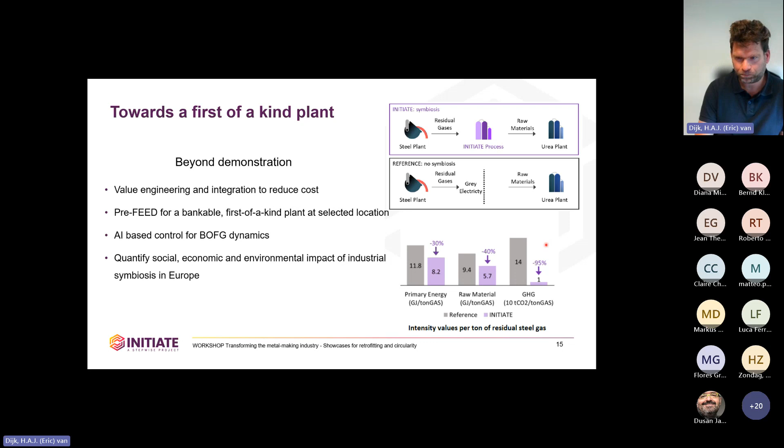And with that, I would like to end my presentation, and if you have any questions, feel free to ask.